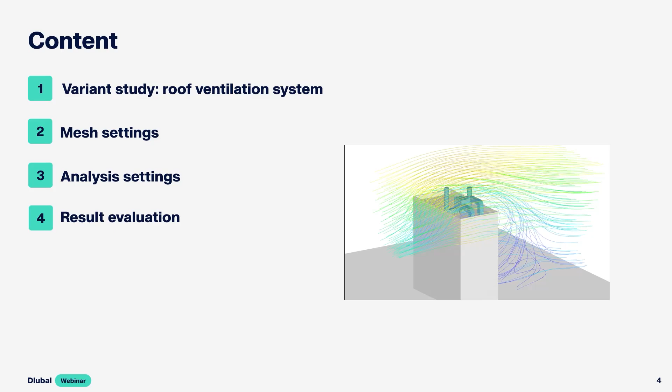So without further ado, let's jump into the program. I already modeled this ventilation system. Here it's a basic, very simple geometry, but it can reach any complexity according to your requirements. But for a preliminary stage, it's probably sufficient.

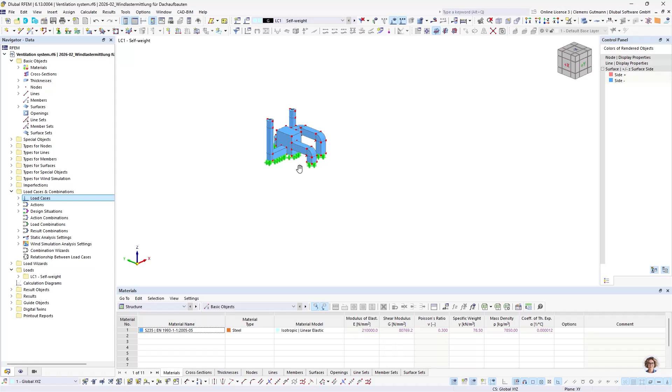So what are we going to do? Right now, this rooftop equipment is floating in the air, so we are in need of the building. When carrying out a wind simulation, most of the time you have part of the structure that is of interest. In my case, it's the ventilation system, and I'm not interested in the building. So I could now model the building as well, as a hull for example, but I chose a different approach.

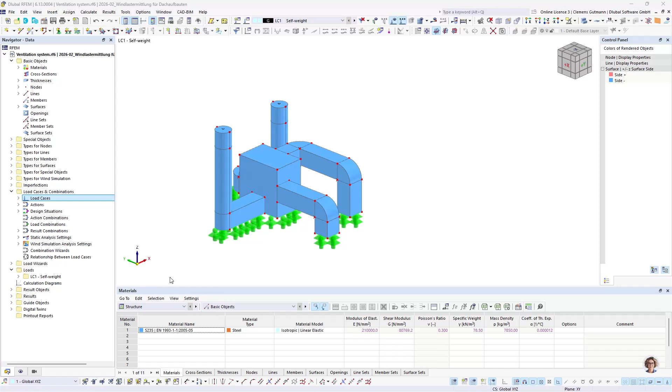I prepared an IFC file. I'm going to import this, and this IFC file will be a so-called surrounding object. So this will be part of the wind simulation, but it will not be part of our static analysis and everything in the design process later on.

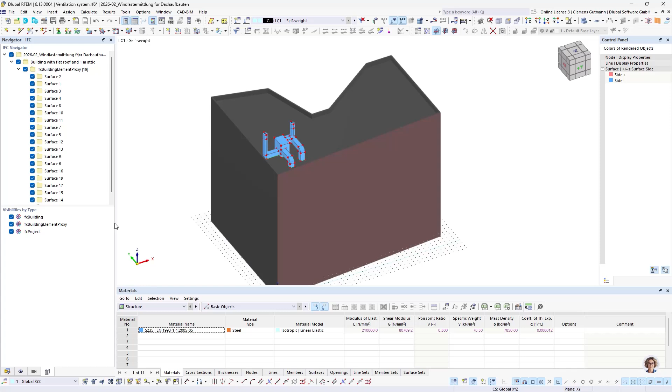So I can just import this IFC file, and lately there have been some changes to the settings. Formerly, if you went to calculate the mesh settings and you had the wind simulation add-on activated, you got this new tab, and here were the settings for our shrink wrapping. So what is shrink wrapping? Maybe a quick recap, because it's very important to understand this.

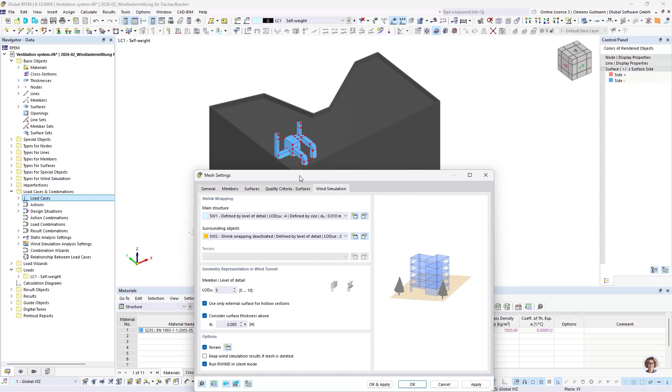So shrink wrapping is not actually a part of CFD. It's a functionality that is one of the main advantages of our RWIND program. If you carry out a CFD analysis with any CFD program, you need a structure that is topologically perfect. What do I mean by that?

Right now we're looking at a static analysis model. Just quickly going to hide this. So, and it's perfect. These are the middle surfaces here of the structure of these sheets. But in reality...

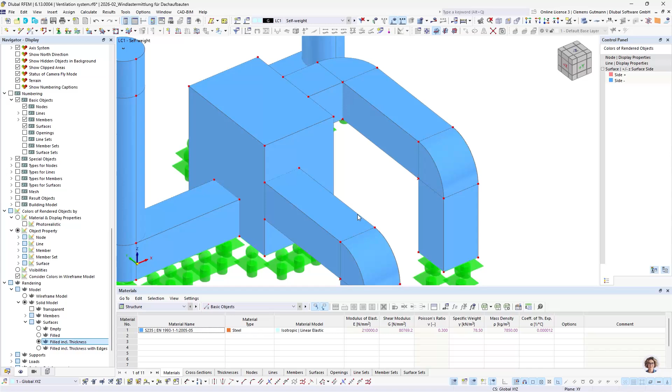Let's say in the background, we actually have something looking like this. So I have to zoom in a little bit here. So here, these sheets actually have a thickness, and we can display them as extruded thickness, but that also means that this is not how it looks in reality, right?

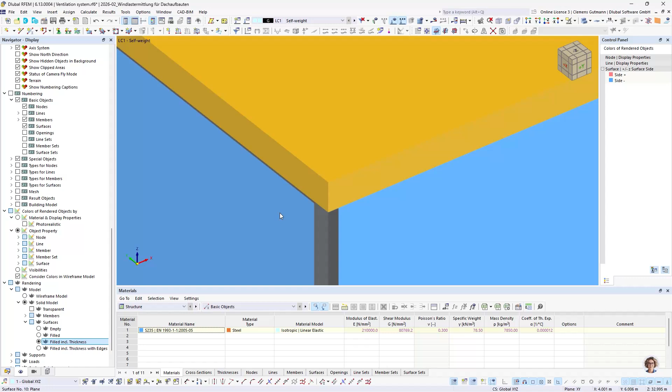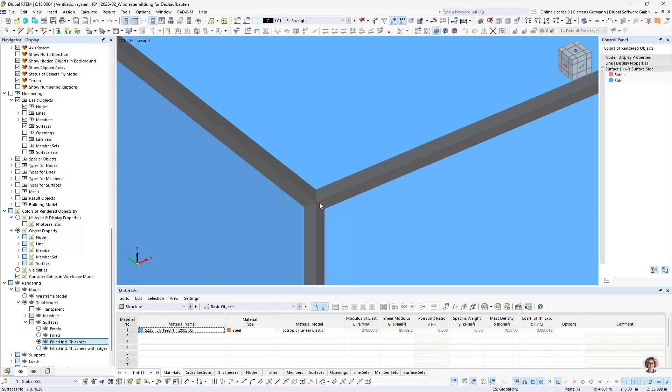So what we have now is, let's say, volume elements that intersect with one another. So we don't have a closed hull, and this is a requirement when carrying out CFD analysis. So what can we do? What you usually have to do is run, or prepare your model for the calculation. You have to fix your geometry, patch all these openings, and clean up all the intersections and so on. And this is quite an amount of work.

And if we have RFEM 6 as a starting point, we don't want to do this. We want to start with a static analysis model.

So what we introduced is a so-called shrink wrapping. It's basically what it says - we are shrink wrapping a geometry. We are putting a polygon mesh above this structure, and we can decide how fine or coarse this polygon mesh is. This wraps around the structure and generates automatically a closed hull, and hence produces a calculatable CFD model. So back to the shrink wrapping settings.

So if we go back here, formerly we had one shrink wrapping setting for everything, and now, since a couple of months, it is possible to assign these shrink wrapping settings to every object individually. There's still a global setting that you can adjust as before, but you can create new shrink wrapping settings and assign them to specific objects. So if you have a specific area that you want to have a finer mesh on, you can do this.

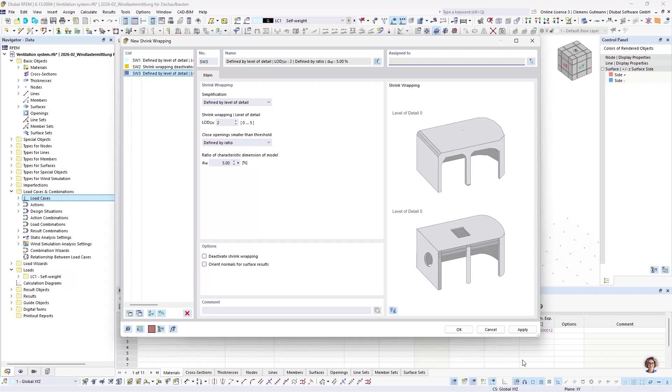Also, you can apply different shrink wrapping settings to the surrounding objects and the main structure. The main structure is what we are going to calculate, our ventilation system, and the surrounding object is, in my case, the building, but it could be anything that you import as an IFC file or STL file or something like that.

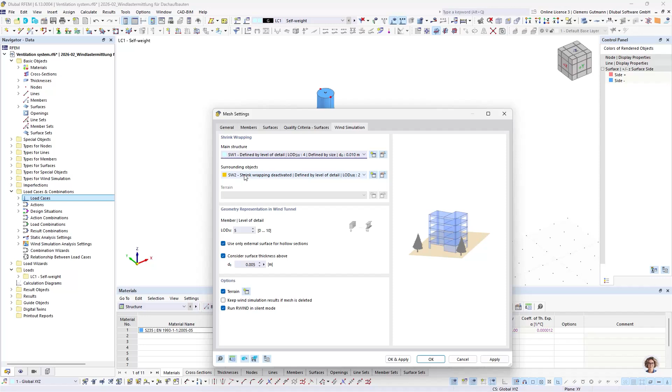Maybe back to the IFC file. So if I want to apply such a shrink wrapping setting to a specific object, I can go to the object and activate this checkbox, specific wind simulation settings, and here I can pick another shrink wrapping setting that is different from the global setting, and then this specified shrink wrapping setting will be applied to this object.

The same goes for roughness and permeability settings, which we are not going to use today, but they also can be defined now on an object basis. It is also possible to exclude a certain object from the wind tunnel with this setting - so not to delete any object, but just temporarily exclude it from the wind tunnel, you can do this here.

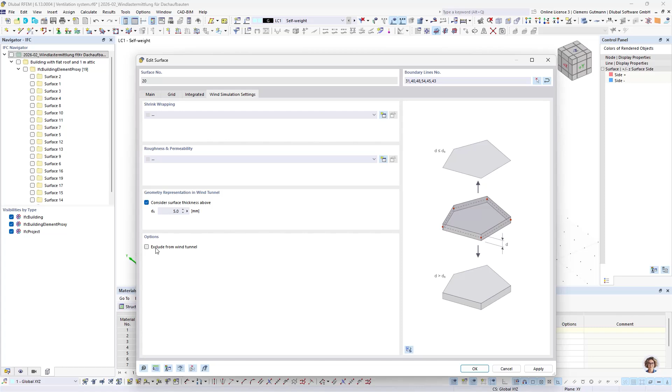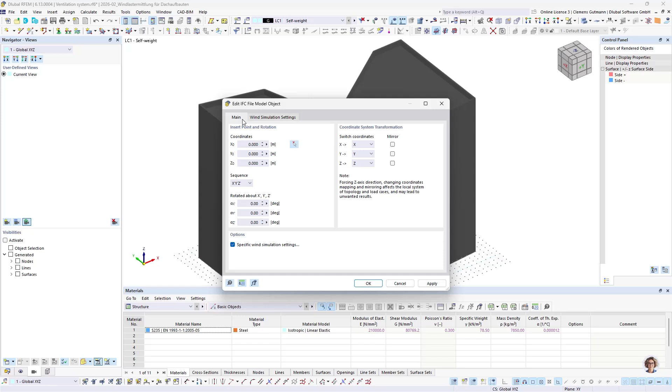So now to the IFC file. If I go to the IFC file and I also want to make changes to this specific file, I can go here to the Edit IFC model, and here I also find this checkbox. So here I can apply the same settings as for the real objects that I have in RFEM 6.

So this is the shrink wrapping mesh, but with a CFD analysis, we have more than one mesh. We have the shrink wrapping, which is the simplification of the structure. Then we have the volumetric mesh.

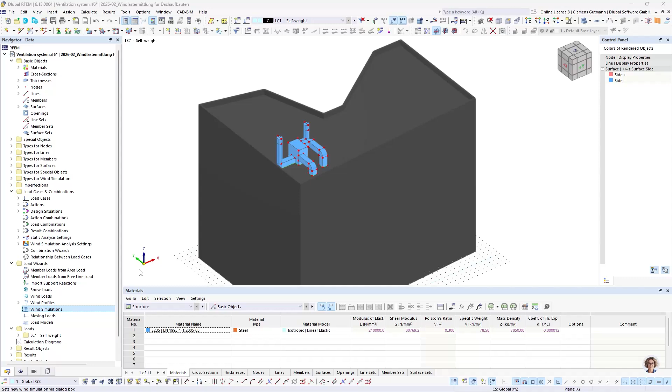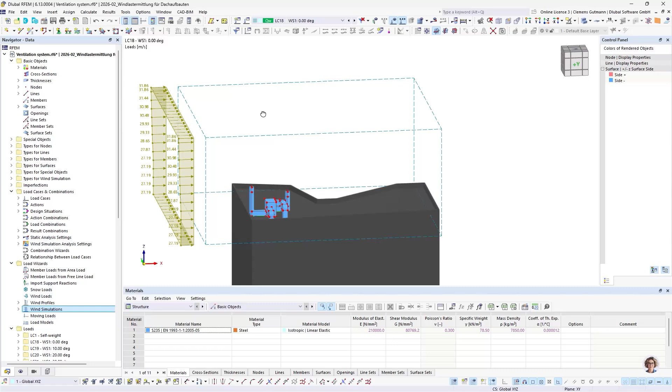So if we create here a load case using, for example, our load wizard, and now we have this wind tunnel, and this wind tunnel is a 3D box. And in this box, there's air, and this air has to be meshed so we are able to carry out the wind simulation analysis. That means that we have this volumetric mesh that fills out the box.

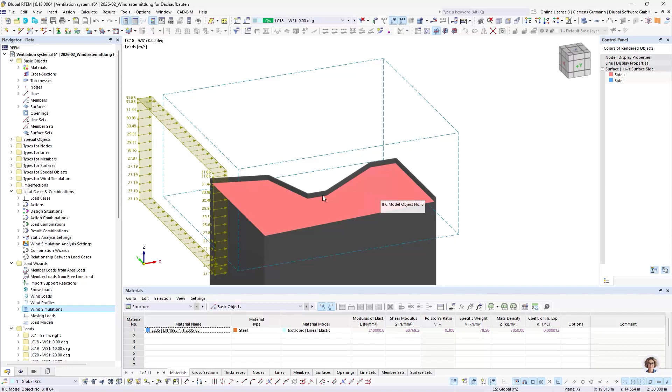And the algorithm that creates that mesh now interacts not with the original geometry, but with the shrink wrapping mesh, if it is applied. So if I have a perfect geometry, like my building here - it's an IFC file, but it is completely closed and ready to calculate - no shrink wrapping is needed, and hence it will not be created for these objects. Similarly, if I have a perfect geometry with my static analysis model, for example a simple plate or sheet, a perfect box, there's also no shrink wrapping needed. But if there are intersections or anything not CFD calculation ready, the shrink wrapping is applied.

So now we have this volumetric mesh generator, and it tries to snap to this shrink wrapping - we are going to look at how that looks like later. It is important to understand that the shrink wrapping mesh and this volumetric mesh inside, closest to the model, are not the same. So the inside part that is closest to the structure, we are going to call the computational mesh. That is what we are going to see later in the results as an option.

So here is something important to know. Since we have the original model and we have the shrink wrapping hull, there's a gap between them, and we have to transfer the loads that are calculated to the original model. So there's a small error during this transformation process. And to minimize that error, it is important that the calculation mesh, so the volumetric mesh, has a higher density or equal density than the shrink wrapping mesh.

Okay, maybe one other change before we look at the meshes. Formerly, it was possible in the mesh settings to choose an IFC terrain. This option has now moved. Now you find it under base data terrain, where you also found in the past the simple planes, but now here you find the option for the IFC terrain if you want to use one. In my case, I don't want to use it.

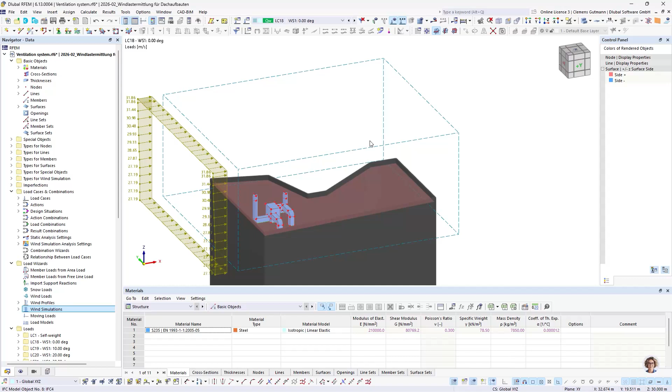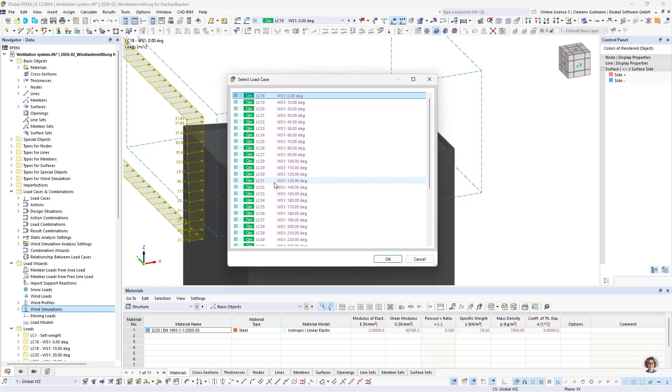So maybe let's take a look at these different meshes. If I go to calculate, I can go here to RWIND and select a load case. Why do I have to select a load case? In RFEM6, we have multiple load cases in one model file, but with the CFD analysis, it's always one load case is one model file. Why is that? For one analysis, you have one wind tunnel with a specific size, and we have one model file that is rotated at the specified angle, and this cannot be done in the same file with RWIND3. So here you select the rotation of the model, and then the geometry is exported and made ready for the transfer.

RWIND3 is started up, and on the wrong monitor. I need a license.

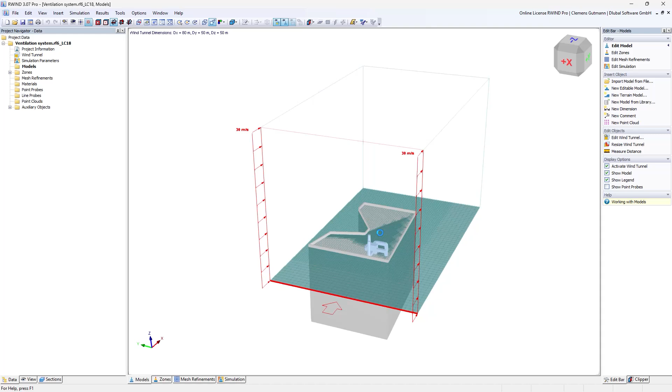And now the objects are placed, and what you just saw is automatic resizing of the wind tunnel. This is another advantage of RWIND. Usually the size of the wind tunnel has to be determined by the user. This can also be done with RWIND, but we also have implemented an automatic algorithm that takes into account various parameters, such as the size of the model, and has some default size, which is a compromise between accuracy of the results and the calculation speed.

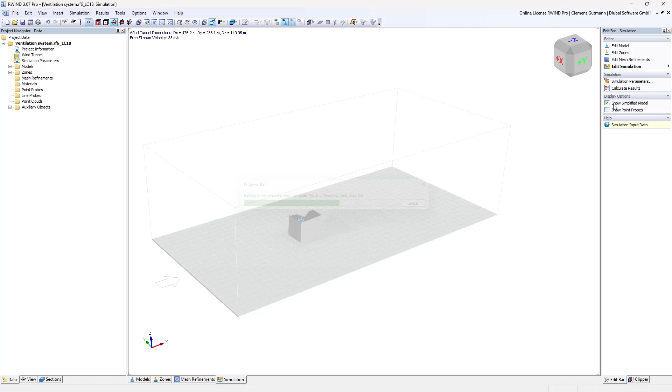But if you want to adjust the wind tunnel size, you can do so at any time. So if we are in RWIND, we can check this 'show simplified model' checkbox, and now, in the small scale, something happened. If I check this off, we see the geometry that has been transferred from RFEM6, and now you can see this shrink wrapping mesh.

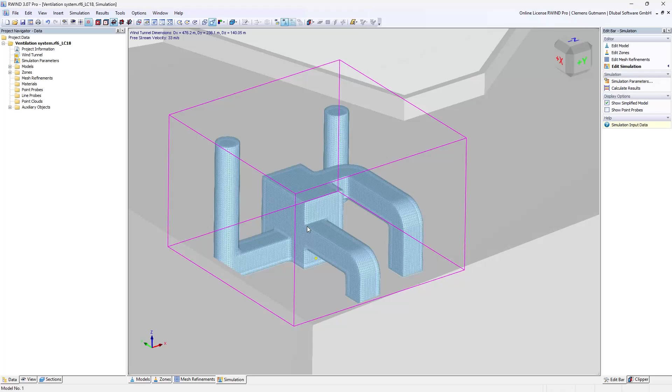The resolution of this mesh can be set. We saw this already in RFEM. If we are in RWIND, this can be found under models here. So we have this level of detail parameter. The higher the level of detail, the finer the mesh. And what does this level of detail mean?

The algorithm that generates the volume mesh works like this: you have a certain basic mesh size, and this basic mesh size gets halved with each level. So if for example I start with 1 meter, then level of detail 0 would keep my 1 meter. And if I have level 1, I have 50 centimeters, and level 2 is 25 centimeters, and so on. That's how this is working.

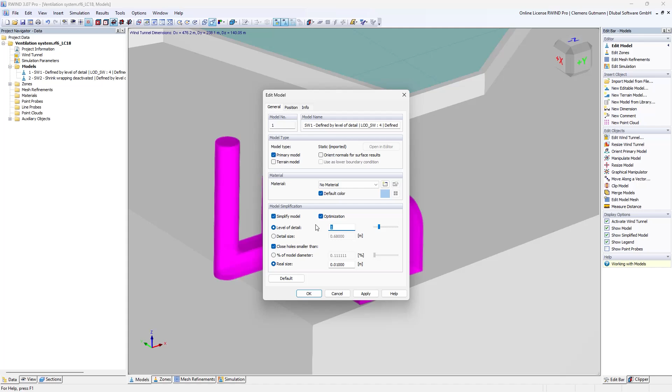But depending on what you choose, you also get a calculation of what result you get. If you pick the detail size instead, you can specify a certain value, but what that does is it just looks for the most adequate level of detail.

Now on to creating the mesh, the volumetric mesh. Here I'm going to simulation, generate mesh, and this takes a little bit longer because in CFD we're usually talking about a 6-digit number of cells, of elements, so up to 7 or 8-digit numbers. It's a lot—you have a lot more finite elements than with a static analysis. That's why the calculation times are also longer than we know from a finite element analysis.

In RWIND3, we use this snappyHexMesh algorithm that is part of the OpenFOAM solver, which is the basis of the calculation. It basically works like this: you have this wind tunnel box, and it is filled with regular boxes, like mesh elements. Then the mesh is refined around the model, and then the elements that are inside of the model, where there is no air that is calculated in CFD, they are deleted. So this is like a multi-phase algorithm, and that's why right now you saw there were 700,000 or so, and then the number dropped again, because the elements that are not used in the calculation are deleted.

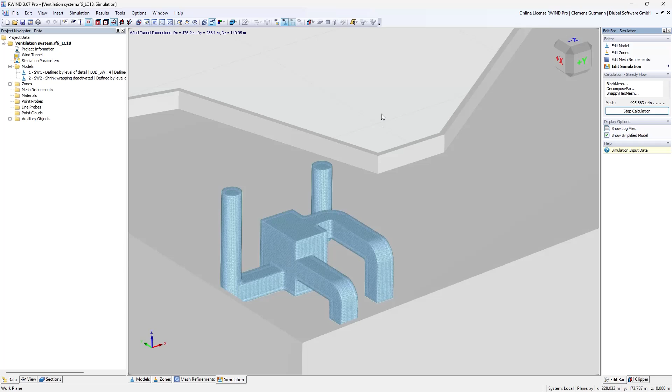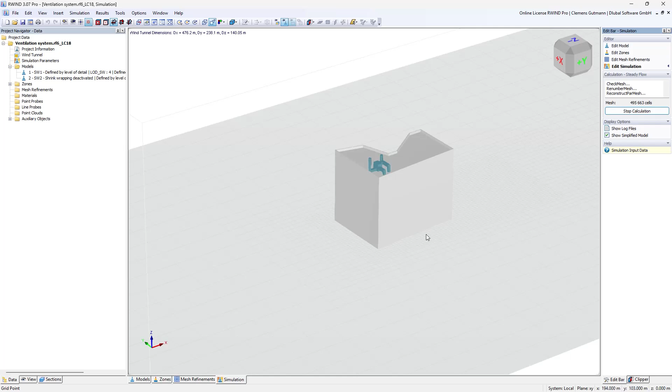Maybe one more thing that we can see here. So usually when you carry out CFD analysis, you have to refine the mesh around the structure you want to analyze. This is something you have to do manually with other programs. In RWIND3, you can do it manually, but by default there's also an algorithm we implemented that automatically refines the mesh around the model.

You can see here on the floor of the wind tunnel that there are finer element sizes near the model, and it depends on the settings how many of these mesh refinements are stacked on top around the structure, and how fine the refinements are.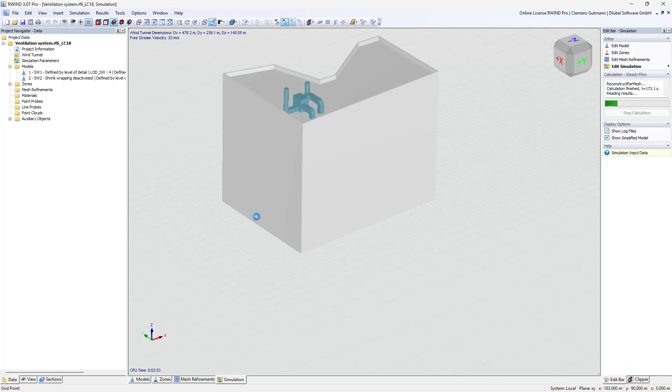So here you can see that: on the outside you have the big elements, and the elements are getting finer the closer we get to the geometry. Now we can also take a look at the mesh sizes.

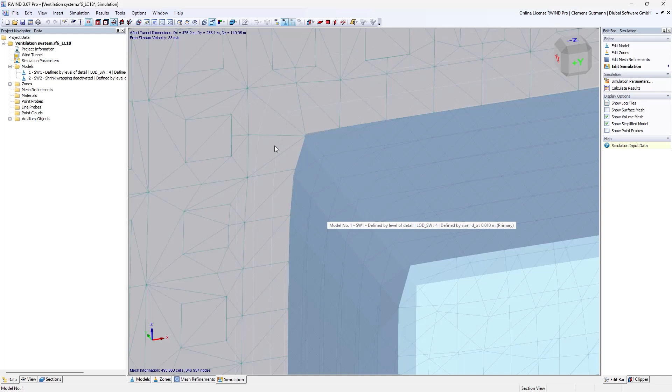Here we have on the left and top a section through the volumetric mesh. We can also see our boundary layers, where we have additional refinements around the structure. And here we can see the shrink wrapping in blue, and you can see that they almost match, but not exactly. So that's what we have to take into account.

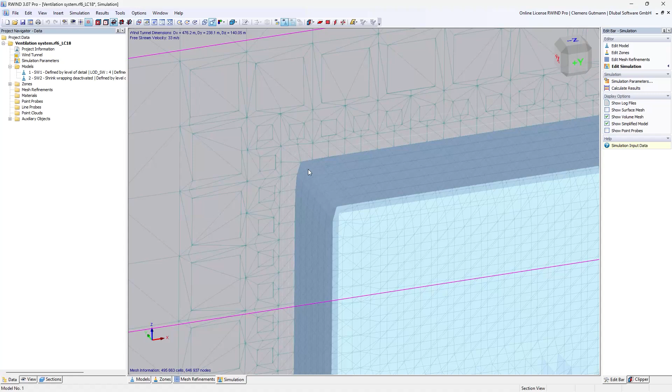So here the mesh sizes are somewhat equal, so I think it's okay. These are the default settings, so if you go with the default settings, you should be okay. But if you plan to refine your shrink wrapping settings to get a closer representation of your structure, please have a look at the volumetric mesh so that it is not coarser than the shrink wrapping mesh.

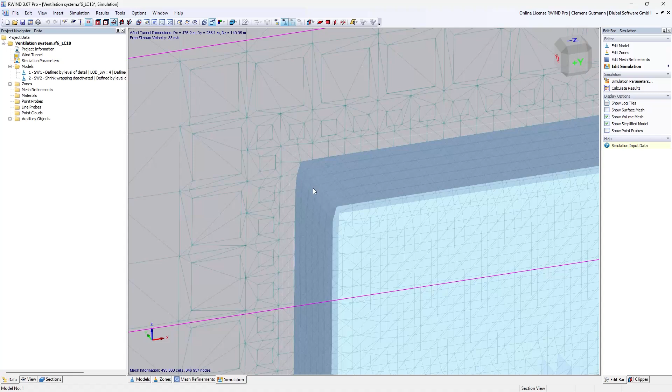Okay, so let's go back to RFEM6 and take a look at this mesh refinement factor that I was talking about a while ago. These can be found in the wind simulation analysis settings.

So here you have this finite volume mesh density factor. The higher the number, the higher the number of elements will be, and also the mesh refinement - the number of mesh refinements changes, and the mesh size also changes.

Please note that this factor, or this algorithm, doesn't behave in a linear way. So if you want to carry out a mesh independency study, this can hardly be done using this algorithm. Here it is better to use manual mesh refinements, because it's an algorithm that doesn't refine the mesh linearly, and hence it is not suitable for a mesh independency study.

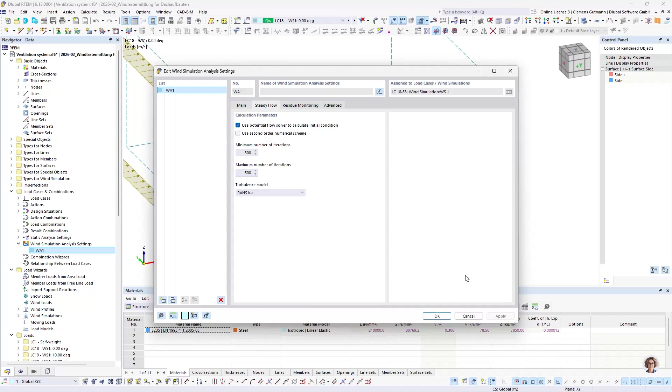Then we can go on to the results. For the results, I want to first point out an online manual of ours. CFD is a quite complex area, and it's not easy to understand or to validate. So if I have a single span beam, I have some analytical formula that I can check if some program calculates the forces correctly and so on.

But for CFD analysis, there is no analytical formula that you can take. Well, okay, there are some for simple geometries, but for more complex applications, it's not as easily possible. Of course, you can have some testing data, but these have to come from somewhere.

To get some idea how it works and what things are important, we created this CFD analysis application online manual. You can find it under Resources, Online Manuals, and if you filter for RWIND you have the RWIND online manual, but also you can find this CFD analysis application manual, where you find some interesting information that gets you started with the topic of CFD analysis.

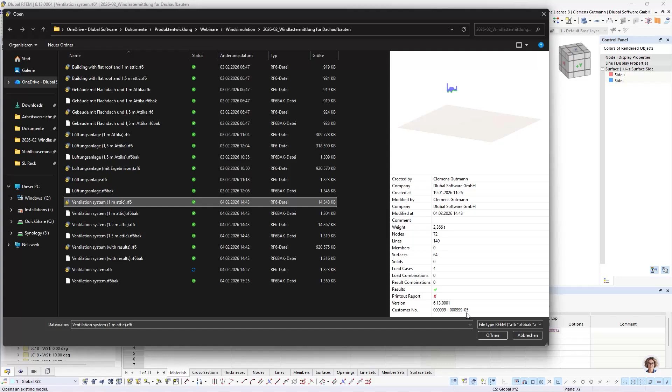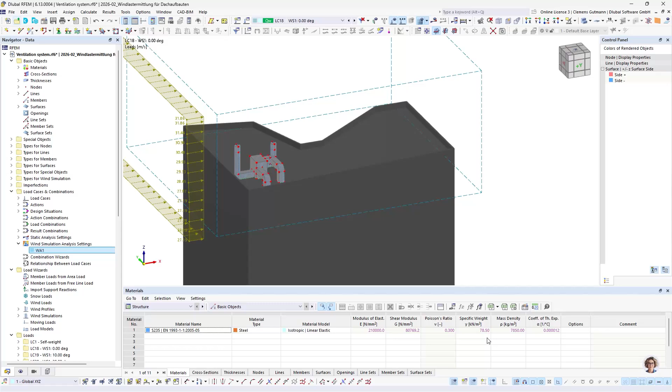I have prepared the result model files because the modeling, or the calculation, takes quite a while. So first I want to show you a model where I looked at multiple directions. I made a full 360-degree calculation with a step size of 10 degrees, and this is also a new feature that came into the program recently.

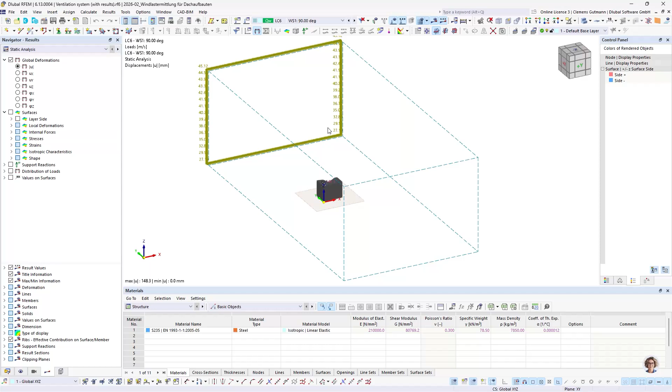Here we have our results for load case number 6. I calculated multiple load cases here, turning the wind tunnel about the building like this. And here we have, of course, the static analysis results, but for these wind simulation load cases, we also have the wind simulation analysis results. I can show you now the result types.

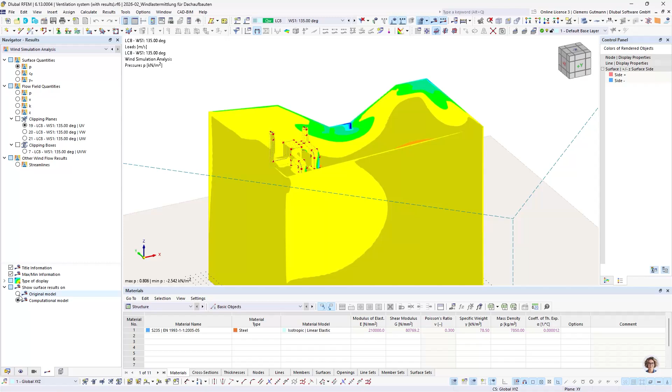So we have this computational model. The computational mesh is quite similar to the shrink wrapping mesh, as I said before, but it's not the same. It's like the outside or inside of this volumetric mesh where the calculation is performed. So this is the computational mesh. Then we have the original model, which is our RFEM geometry, and there we have this interpolator that transfers the load from the computational mesh to the original model.

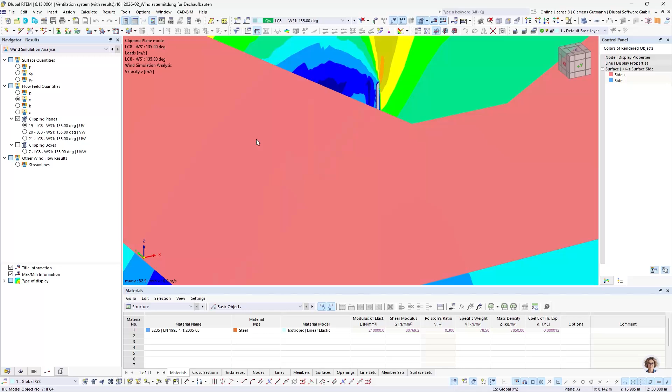Now we can look at different quantities. We can look at the pressures. We can look at flow field quantities like the wind speed about our building. Maybe choose a different one. Okay, here. And also, recently added to the program, are the streamlines.

Streamlines were already possible in RWIND. Now we can have a basic view of the streamlines in RFEM 6. Right now we're working on bringing more options to control the number of streamlines and their position in RFEM 6. If you want a more comprehensive view of the streamlines, feel free to go to our RWIND program and use the full-feature streamlines there for the moment.

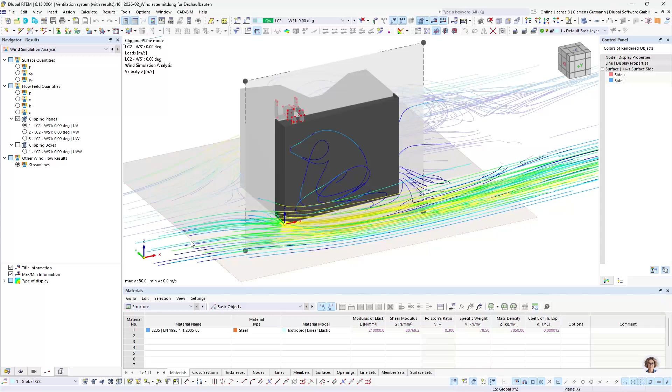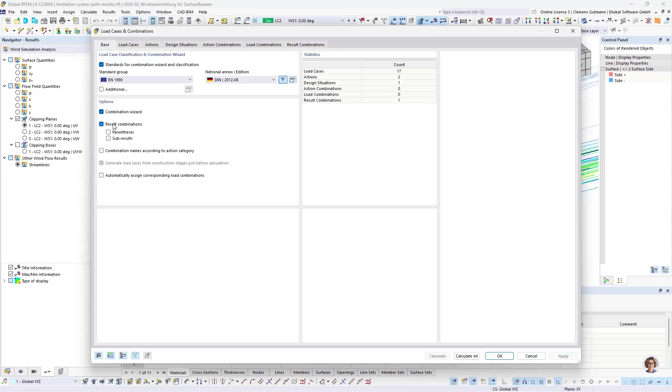Now I have these results, and maybe I'm interested in combining them and having an envelope. This has been possible for a while. If you create a result combination, by default this tab is not visible, so if you are missing it, go to Base and activate the checkbox for the result combinations.

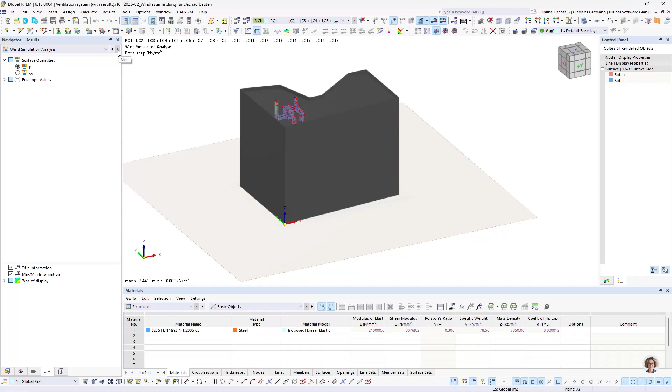If you generate one and assign solely wind simulation load cases, you have another option here. If I go to the result combination, usually you have it for the static analysis, but we enhanced the feature to also provide surface quantities for the pressure and CP values. However, here you have no option to display results on the computational model. Why is that? As I said, every load case, every wind direction, has its own RWIND file — it's a separate calculation with a separate rotation of the model, a separate shrink wrapping, and a separate volumetric mesh.

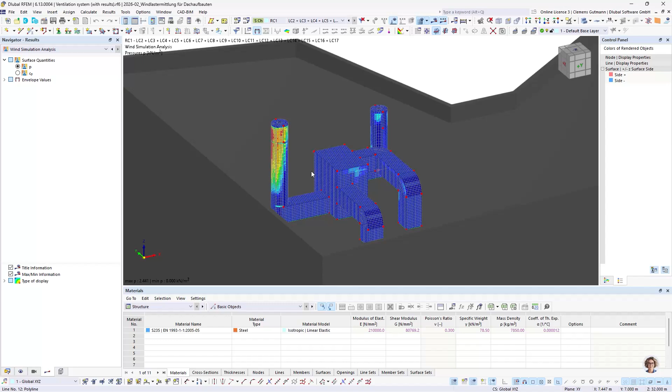Hence all the computation meshes are not the same, so we have to find the next common ground, and that's the original model. That's why you can only find the results for the result cases on the original model file. But here you have the possibility to look at the minimum and maximum values calculated for each finite element separately.

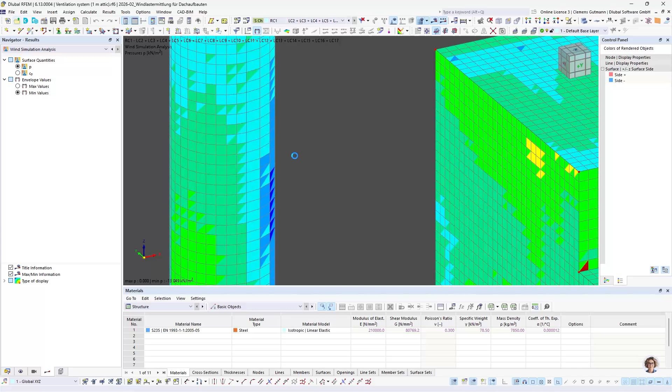The next file I prepared is about the 1 meter attic. Here I only calculated one wind direction, but of course this can be extended to the full scope of the analysis. I only want to take a look at the differences here. To make it easier, I'm going to close the other files.

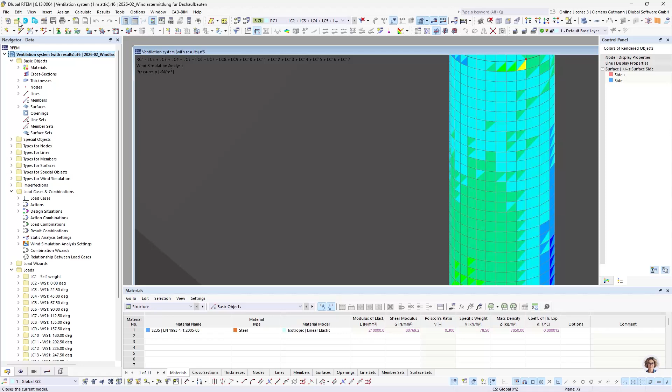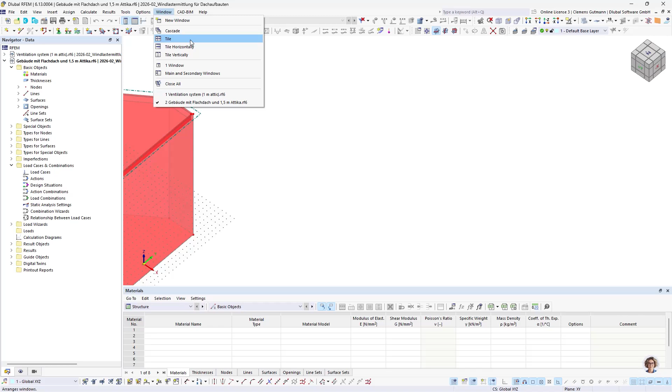And open the one with a 1.5 meter attic. Then we can take a look at the results side by side. If I go to Window, tile vertically, I can... oh sorry, I opened the wrong one. This one.

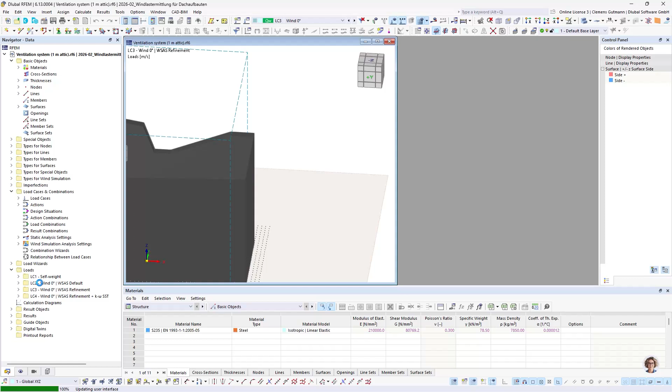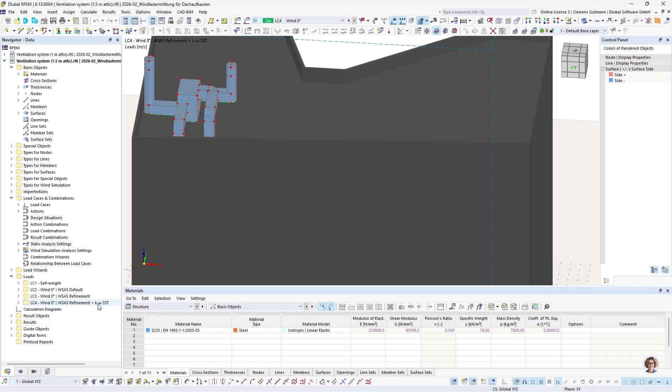So you can see it here. I analyzed three different variants of the settings. The first settings are the R-wind and RFEM default settings. Then I applied a refinement regarding the number of iterations and also the refinement of the volumetric mesh density. And then I also changed the k-epsilon to the k-omega SST turbulence model.

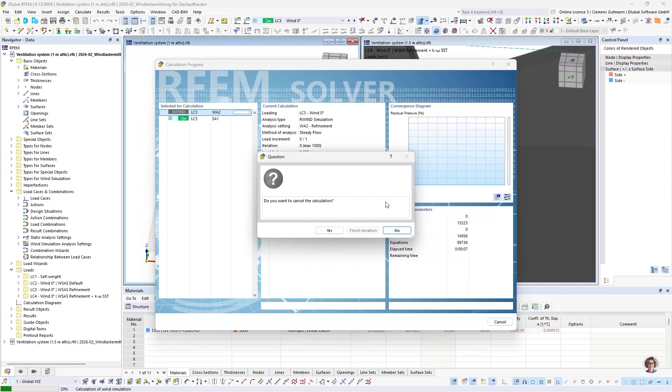Now let's take a look at the results. So here... I have no results. So I have to open the German version. They have results. Sorry for this interruption.

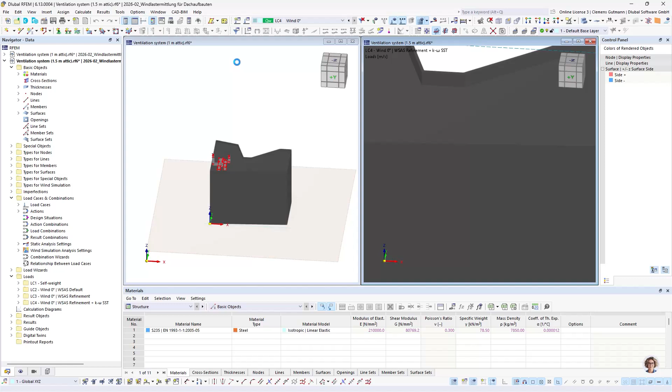If the question comes up, how long did the calculations take? Depending on the load case and the settings, for this model we had a calculation time of something between 5 and 25 minutes per load case. This highly depends on your machine and the settings. So for these load cases it's about 1 hour, let's say, because I had the different settings.

So here, the 1 meter and 1.5 meter attic results.

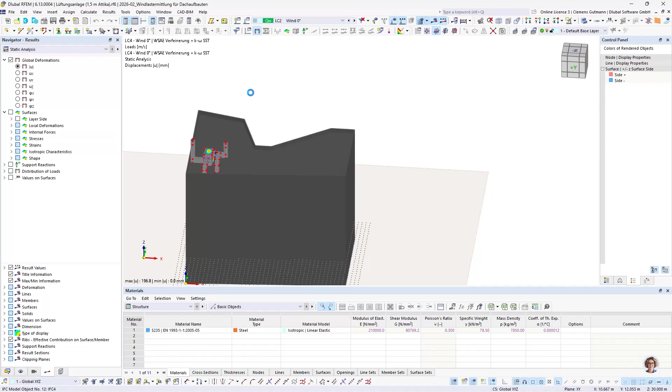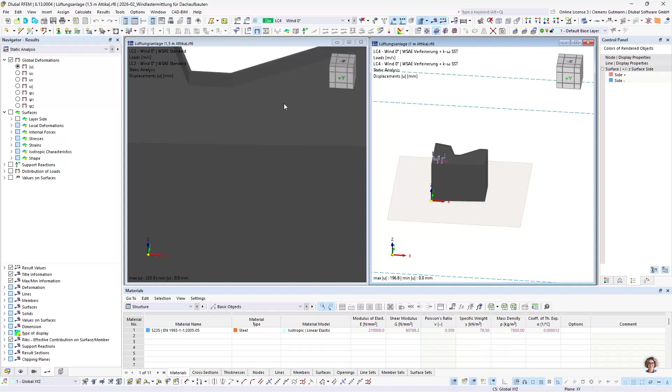So if we now place them side by side, we have the 1.5 meter attic on the left and the 1.0 meter attic on the right. Just going to hide the IFC model to have a better view.

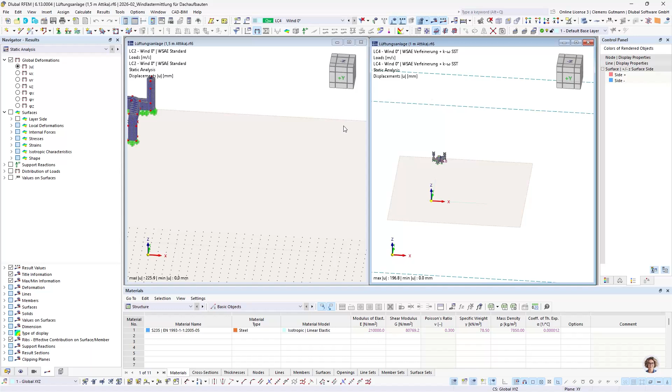If we look at the 1.5 meter attic in the wind simulation results with the default settings, we can see we are going to compare the drag forces for this example. Here we have a drag force in the x direction of minus about 0.5 kilonewtons, whereas with the 1 meter attic we have minus 0.1. So there's a difference.

Then let's take a look at... sorry, this was the wrong comparison. I have to look at load case 2. So here we have 1.2 kilonewtons in the positive direction. Here we have minus 1.5 in the negative direction.

If we refine the mesh of the volume, we can see that here on the left the value changes to positive, but slightly positive. Whereas here with the 1 meter attic, the drag force increases.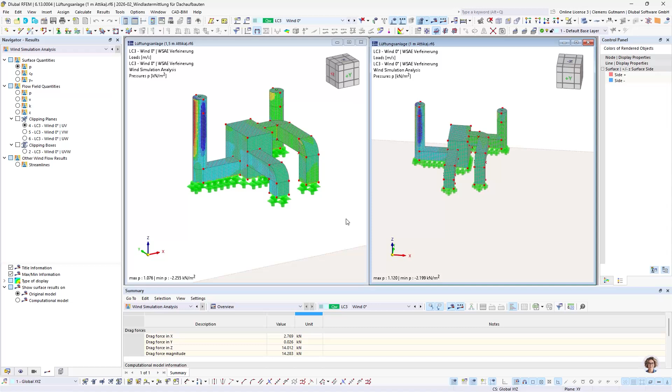And then if we compare it to the other turbulence model, we have 0.3 here and 0.1 on the right side. So as you can see, these are quite huge differences, not only compared to the sign of the value, but also its amount.

And this is one of the key takeaways when dealing with CFD. So CFD somehow works out of the box, but depending on the model, depending on your settings, depending on the wind speed and all the parameters that can influence CFD analysis, the results can change. And there is no globally best practice, like what settings you have to pick, but rather you have to try out different settings and see their effects.

There's also literature about this. You can find content about it on our website. But in the end, this is something that comes with CFD analysis. RWIND and CFD in general is a great tool to analyze the phenomenon of wind, but you have to get a feeling for it. You have to try out different settings and get to know the technology CFD to be able to apply it so that you can rely on the results.